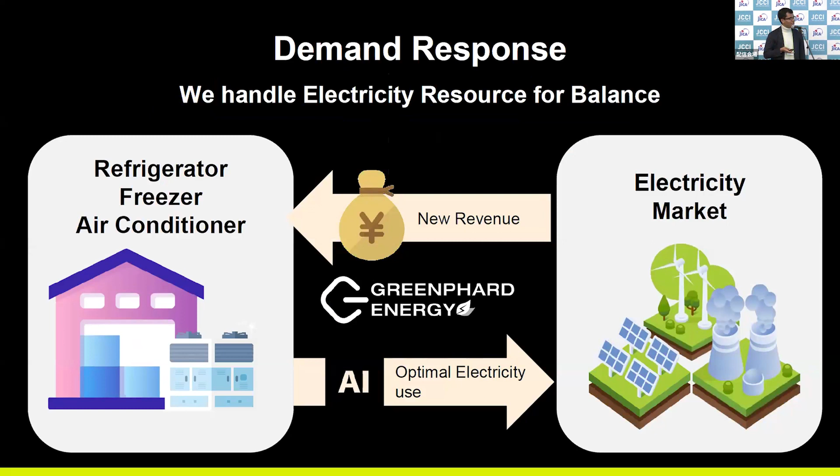So since we have a virtual battery now, your facility, by participating in the electricity market using our real-time IoT control technology, we can respond to requests from the electricity market and generate more revenue for you guys. So your facility basically goes from being a cost source to one where you can generate revenue from energy savings of 10 to 25%, and also from DR, responding to demand response requests.

In the case of a food factory, you can save, literally, I'm not joking, no double counting here, more than $1 million. And then coming to what happens to the environment: you are saving energy, you are helping the supply side tackle energy imbalances, so CO2 itself is reduced, and you are contributing to the environment.

And who are our clients? So basically almost everything. By target 2028, we plan to have 1,000 megawatts of resource. These are the social problems you can help us solve by collaborating with us: more renewable energy, revenue creation, and CO2 decrease.

So what do we exactly do here? Greenphard Energy is here to make a change in how the world uses energy, how all of you use energy. Coming back to the point again, turning cities into virtual batteries—that's what we mean by that. Greenphard Energy will help provide you revenue. And yes, that's it. Thank you very much.

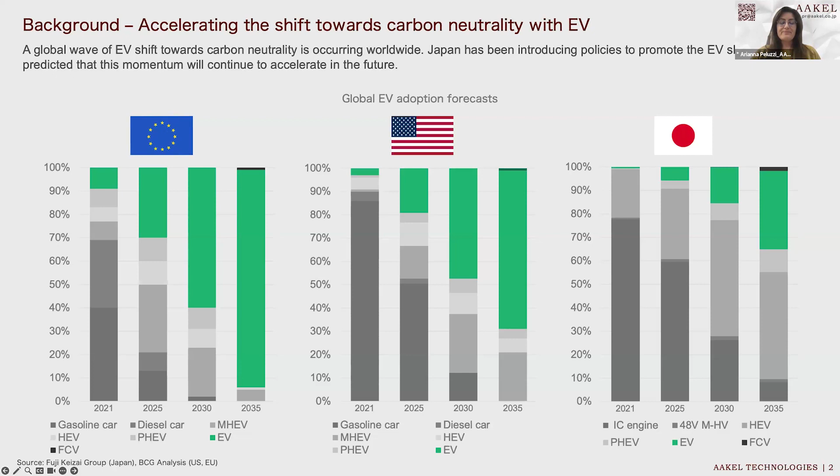When talking about EV charging, there are some general restrictions to take into consideration, starting from charging time. If you want your EV to cover around 100 kilometers, a normal charger would need from 3 to 6 hours, and a fast charger from 20 to 30 minutes.

Another restriction would be chargers and the power contracts. If you want to increase the output of electricity, you need to shorten the charging time, so you need to consider the building's electrical constraints, which means either you update electrical facilities or adjust the power contract amounts. Another restriction is clean energy—we do want to charge our EVs with renewable energy, but the problem with renewable energy is that it is weather dependent and is generated in limited hours.

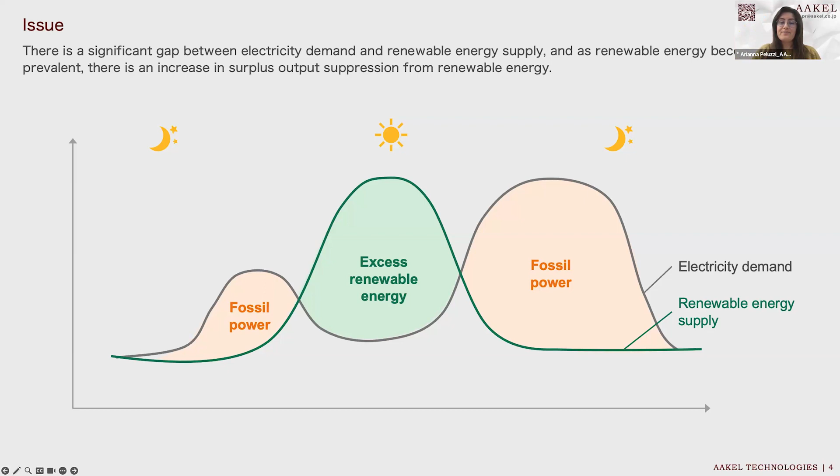So what we tend to do is usually to match supply with demand. But in this case, we want to do the opposite. We want demand to match the renewable energy supply. And to control demand, we need elements such as heat, hydrogen, and EVs.

So to effectively use renewable energy, we need to focus on sector coupling. And AAKEL is focusing on this sector and is developing solutions in it.

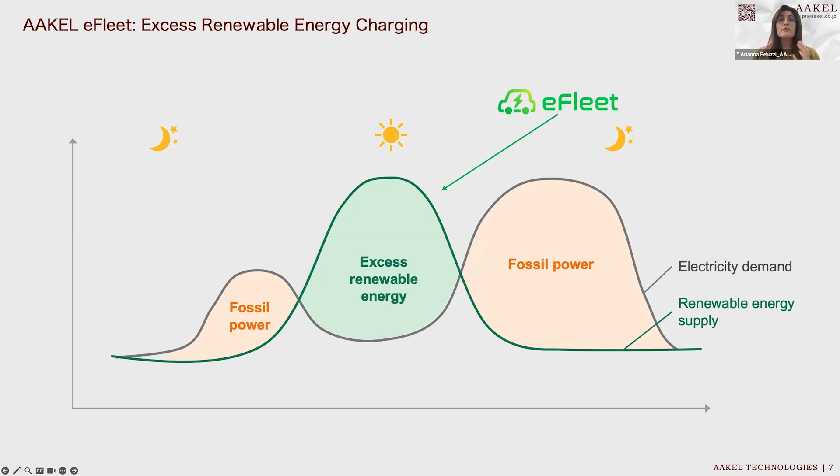Our solution is eFleet. With eFleet, we can create demand during the excess of renewable energy. That's why we want the demand to match the supply and not the opposite, because the renewable energy supply is created only in those limited hours.

Our service, AAKEL eFleet, is a software that gives you a solution when charging and managing EVs. There are different elements involved, such as dynamic pricing. You can create a schedule through the AI, charge automatically at the times you prefer, and it is environmentally friendly and cost-effective.

More in detail, eFleet consists of a vehicle IoT device that we put into the EV. This device reads the state of charge and GPS location information of the EV and sends the data to the cloud. The cloud is then connected to the EMS controller, the Energy Management System, which controls the flow of energy and communicates to the charger and the EV.

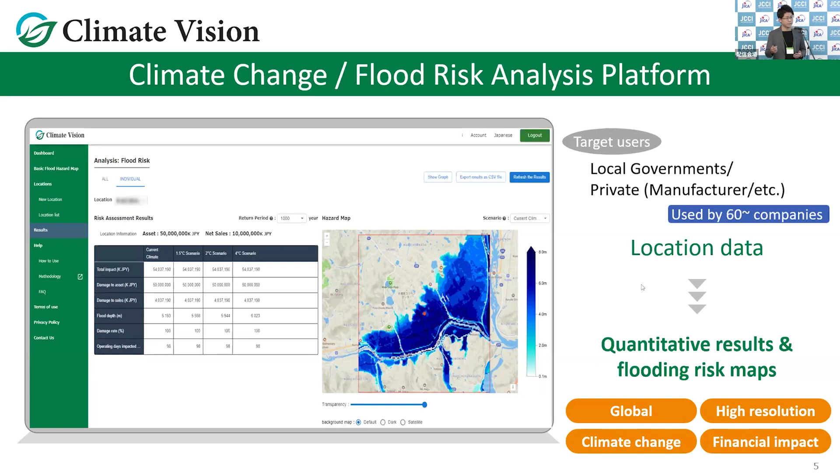First of all, climate risk analysis. By using this solution, you can analyze flood risks anywhere in the world. This solution is used by private sectors as well as local governments who would like to understand flood risks to develop plans for risk mitigation.

One of the features of this technology is the capability of future predictions. For example, at some location, the flood risk might not be so high at this point, but it could be different in the future. By using our technologies, you can understand not just current risks but also future risks considering climate change, including 1.5 degrees Celsius, 2 degree, and 4.0 degrees Celsius increases in the world. You can also understand those risks in a quantitative way, meaning the financial impact.

Our strength is the capability of high resolution simulations. Compared to existing technology, our simulation data is higher resolution. In some cases, existing data might not be sufficient to develop future plans as well as convince people to understand those risks.

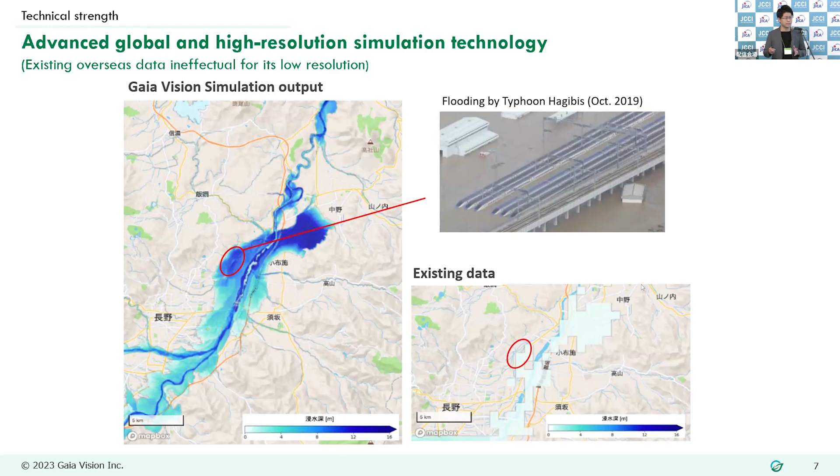Our solution is listed in a national guideline that promotes private sectors to understand those physical risks. Our solution is listed in this guideline as one of the products that can simulate future climate change. Because of this guideline, there are increasing customers who use our solution.

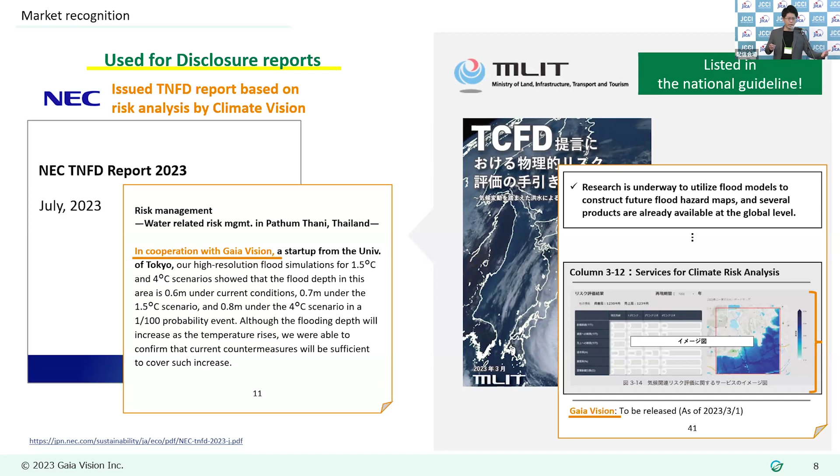For example, NEC announced an information disclosure report last year. In this report, they mentioned that by using GAIA Vision solutions, they understand the future risks at their factory in Thailand, and they identify what has to be done at these factories.

The second feature is real-time prediction. Using this solution, you can understand future flood risk 1.5 days ahead. Let's see the video.

At this point, flood will happen at this red point. This is where a huge disaster happened a couple of years ago, and the flood will come out to the river. By using our solution, the owner of this infrastructure can understand the risk one day beforehand, so they could make some controls at that point.

I would like to show you another demonstration. This is a demonstration movie for how our solution can be used.

What we try to demonstrate here is when huge rain is coming, how the local government can handle it. When huge rain is coming, the people at the local government office wait at the office, and even if the huge rain alert is issued, it's very difficult to make a decision for evacuation orders, especially in the midnight, when it gets more difficult.

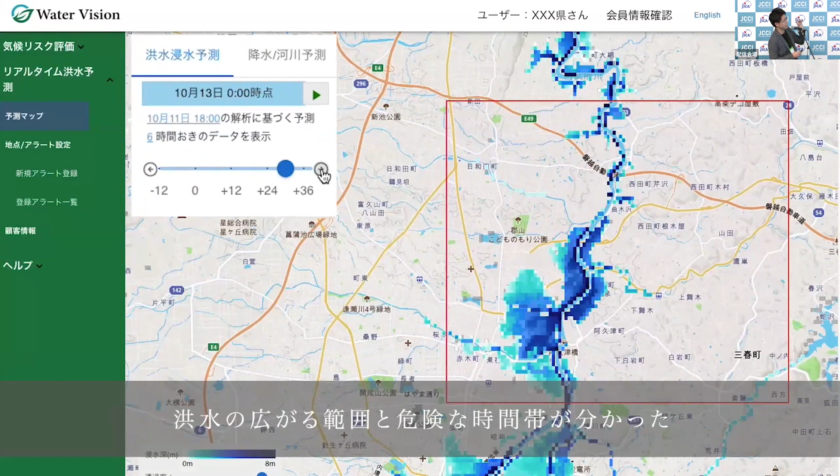By using our solution, there's an email notification which suggests that in 18 hours, the flood will happen at a specific point. You can see the extent and depth on this map, and by seeing this, you can identify which area and when the danger will happen. Based on this information, people can decide: it's going to be okay until this morning, so let's issue the evacuation order at daybreak.

Finally, I would like to explain how our solution is innovative compared to other solutions. Existing solutions are mostly based on river level monitoring using river level sensors, but using our solution, you can identify flood inundation as well—before the flood happens, when and where it will occur, and how to make the evacuation orders. Thank you very much.

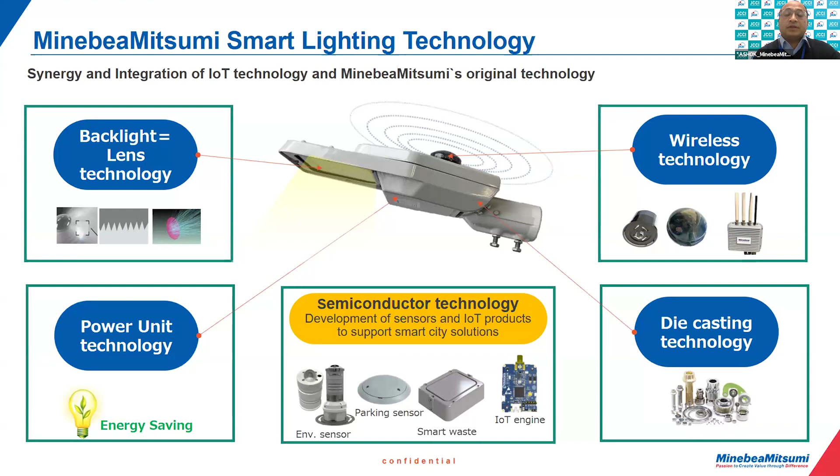With the help of our existing semiconductor technology, we have also developed sensors and IoT products that support our smart city solutions. To summarize our smart city and smart lighting technology, I have outlined five main features. The first is efficient lighting.

Our street lights can emit very uniform and efficient lighting, making the road at optimum brightness. We can also control the lamps for dimming.

The second is wireless technology. Each street light is connected to the internet by a mesh wireless network, which is a free broadband wireless band that can be used freely by the city.

The third is centralized management. Here, all devices connected to the internet can be monitored and controlled by the same CMS, which means the Central Monitoring System.

The fourth is energy saving and GHG emission reduction.

By dimming control of the lamps, we would be able to save excessive, remarkable amount of electricity, and that will contribute in reduction of CO2 emission.

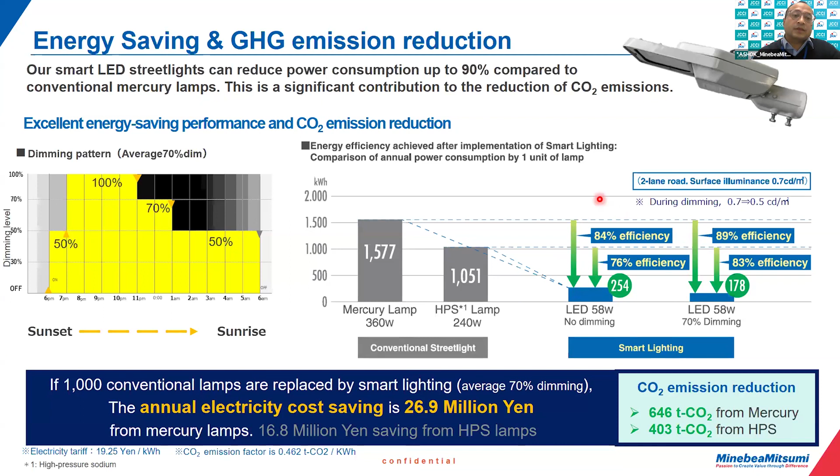This is a use case of dimming in Japan, one of the cities called Nasushiobara City. They adopted our smart street lights and are operating them with multiple environment sensors, using these dimming features to save electricity.

One distinct use of these features was during the earthquake in Japan in 2022, when the central government requested each regional government to reduce the consumption of electricity. The city of Nasushiobara could immediately respond to that request by applying the dimming schedule to their smart streetlights.

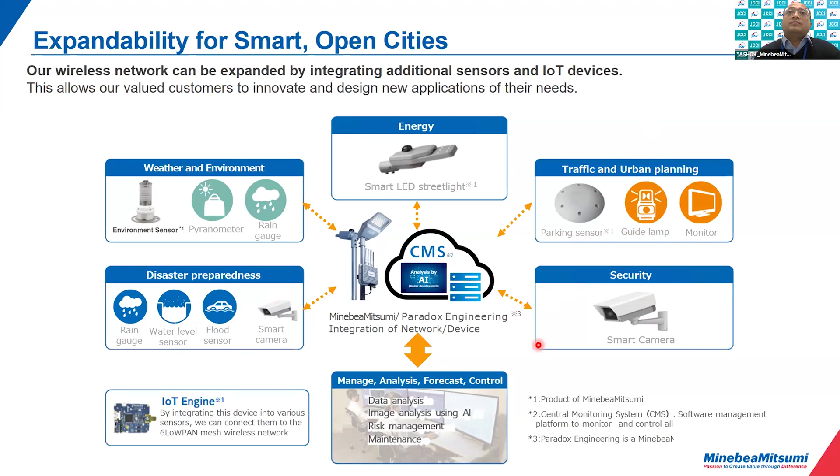This is also one of the important features called expandability for smart and open cities. In the street light network, we can add different sensors and IoT devices to create solutions for the city or for the residents in the sectors of weather and environment, disaster preparedness, security, traffic, and urban planning. So we can utilize the same wireless network platform to expand the solution in different sectors required for the city to make it really a smart city.

Going to the next slide. From now on, I'm going to introduce some of the concept and use cases of the smart city solutions by MinebeaMitsumi. This is one example of IoT devices and the sensor called environment sensor unit that is developed by our company.

It is a very small unit that can be installed in the street light. As you can see, it's a small unit, but it can sense about 8 different types of parameters, and it can be installed easily.

By using this, we can generate different solutions in the sectors of weather and environment and disaster preparedness. Here is one use case of this environment sensor with the camera.

This solution has been implemented in Osaka Prefecture in a mountainous region where they experience heavy rainfall, heavy snowfall, and road icing, causing many accidents. By implementing this solution, they can monitor the condition of the road by camera and also check weather parameters such as temperature, air pressure, humidity, and wind speed. In this way, the prefecture office can control the traffic volume or direction to prevent road accidents.

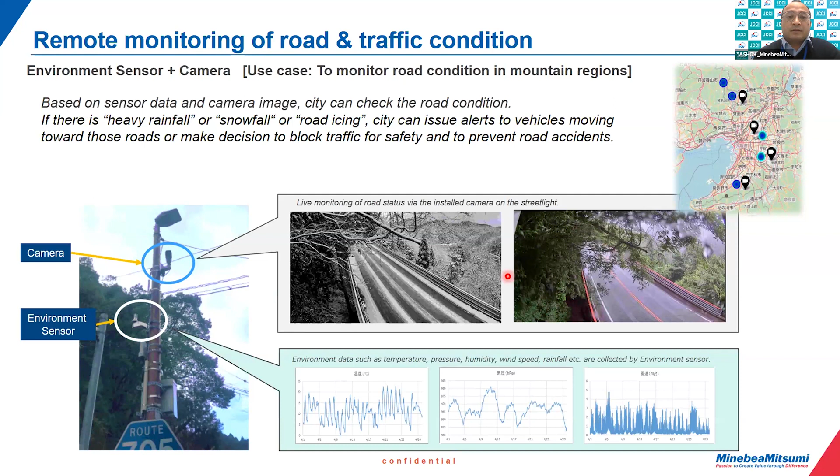Okay, yes. We have a few more slides to show you the use cases, but I'm going to skip to the last.

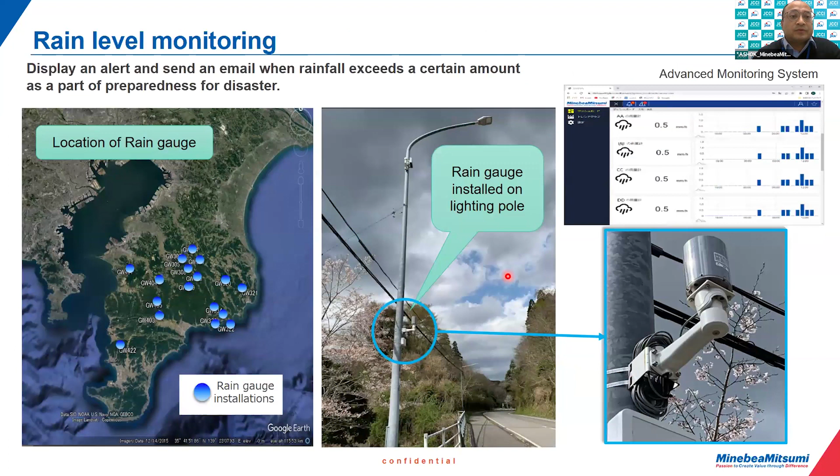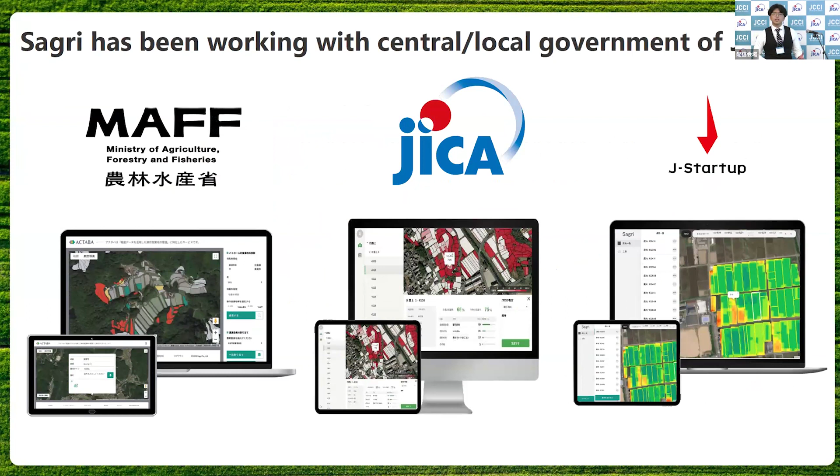In Sagri, we have been working with a lot of central and local government players such as MAFF, and also we have undertaken a lot of projects from JICA. For example, in 2021, we had a project with India, and also this year we are selected for a project in Peru. So not only in the domestic market, we have gone beyond to a lot of different continents such as South America, Africa, and also Asia.

Just a little bit of our accomplishment: 3 months ago, we had the opportunity to present our track record in COP28 in Dubai.

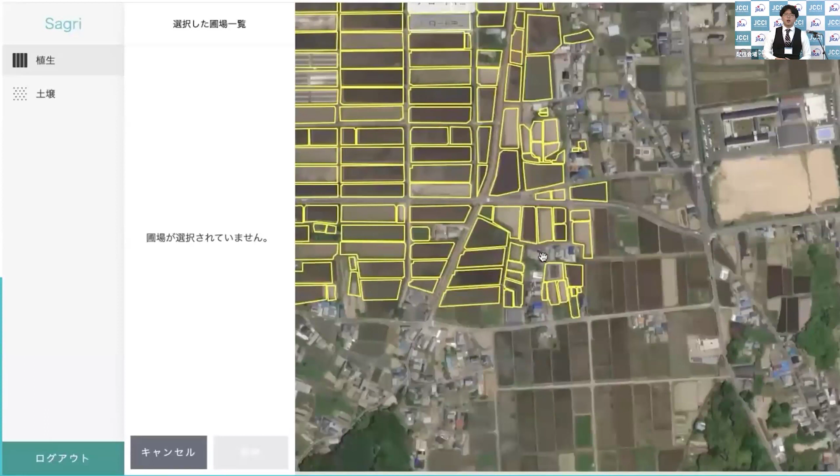So let me explain about our technology. Using our satellite, we are able to automatically create blocking using our technology called AI Polygon. Using this kind of information, we are able to provide several pieces of information about soil analysis, such as the pH, CEC, total carbon, etc. And using this data, we are able to provide advice to farmers to optimize their fertilizer usage.

So our company has two pillars of technology. The first one is AI Polygon, which automatically detects farmland boundaries. The second one is satellite-based soil analysis with an accuracy of about 85%.

In the traditional sense, whenever you want to do soil analysis, what you have to do is take a soil sample and send it to a laboratory. That process itself takes about 2 to 3 weeks, and the cost for one sample is about $50, which is pretty expensive for a lot of farmers.

However, in Sagri, we can provide an alternative in which the time consumed from 2 weeks can be reduced to just 2 or 3 days. Meanwhile, the price itself is only about $5 per hectare. On the right side here, we are providing 12 different parameters, which are micronutrients and macronutrients, very useful for a lot of farmers.

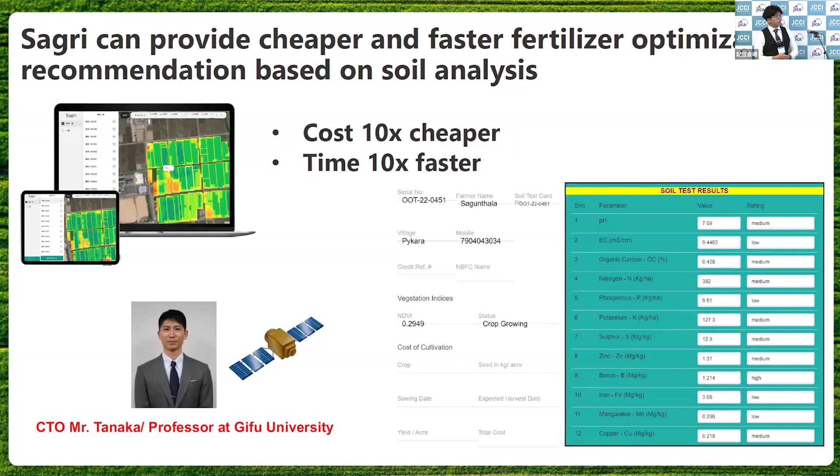In addition, we have been working together with JICA, where we can also detect water. The mission for this project is to reduce the amount of methane produced during rice cultivation.

These are the types of crops that we are able to analyze, such as rice, cassava, sugarcane, etc.

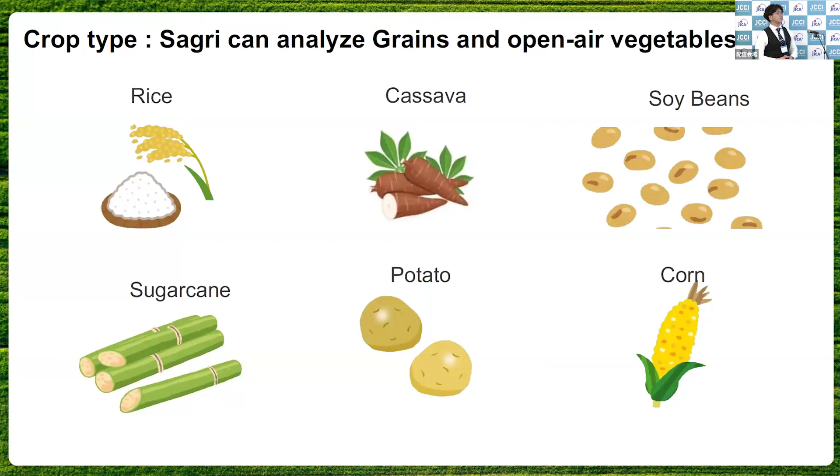As I previously mentioned, using the data we are able to provide advisory to farmers to optimize their fertilizer. If you over-apply fertilizer, it actually becomes counterintuitive, increasing the amount of greenhouse gas emissions, so-called GHG, in the form of N2O. We are trying to reduce this agent of GHG, and at the same time, by reducing the GHG, we are also able to convert them into cash.

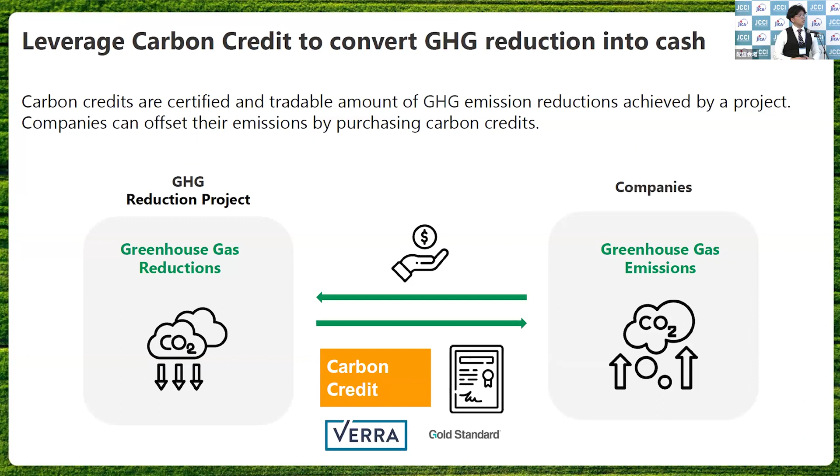How do we do that? We have been working together with a lot of international certifiers such as Verra or Gold Standard, where we claim those reduced GHG into a carbon credit, and then we sell them to companies such as those in Japan and the US.

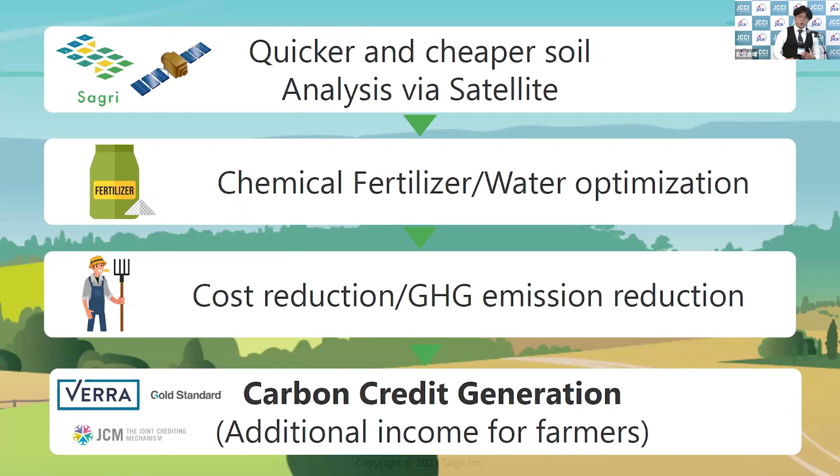So this is the summary of what we can do. The first is that we can provide a quicker and cheaper soil analysis. Second is chemical fertilizer optimization. By doing so, we can also reduce the cost of fertilizer usage, which can lead to a reduction of GHG emissions. And of course, by reducing this GHG, we can claim those as a carbon credit, which can serve as an additional income for the farmers.

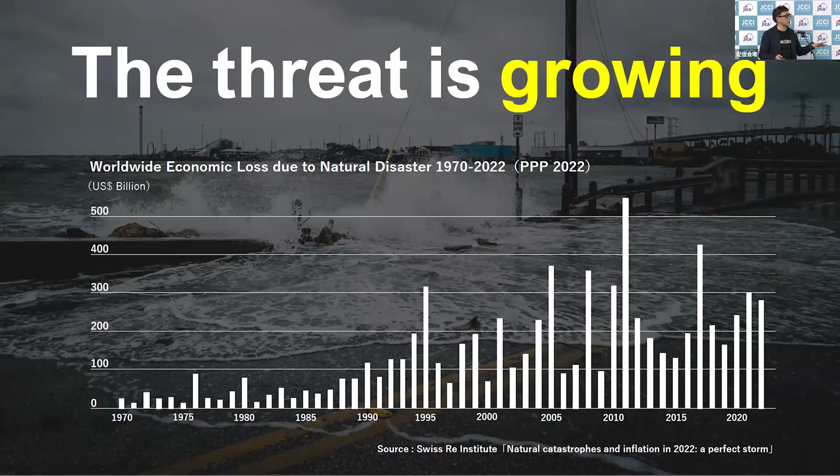SPECTEE - our founder established this company in 2011 to tackle these problems, and we are fighting disasters utilizing advanced technologies like AI. Our corporate mission is to visualize the crisis.

This is SPECTEE Pro. Today we have limited time so I'd like to show the actual product, but today we only show images. We are collecting information from social media, climate data, security cameras, satellite data - so many data sources integrated and analyzed by AI and delivered to customers. We rely mainly on information from social media.

Because recently everybody has a smartphone and most of them use X, Instagram, and YouTube, if something special happens in front of them, they shoot a picture or video and post it to social media. So we use AI to catch this kind of information, spot the exact location, and deliver it to customers.

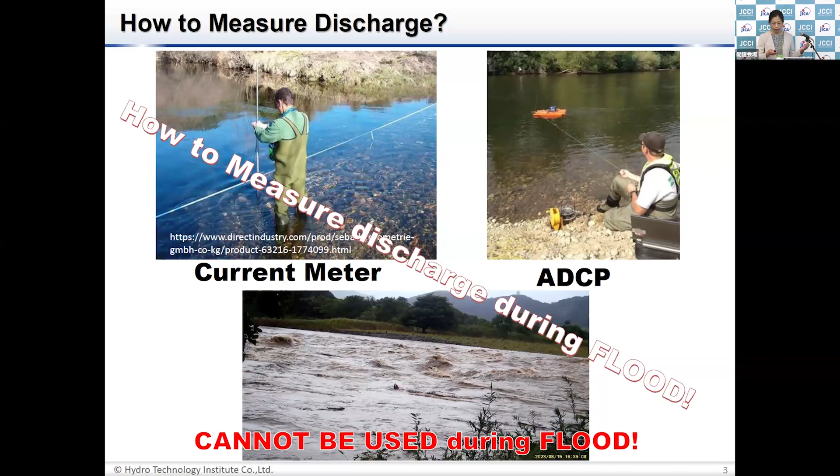The answer is Hydro STIV. Hydro STIV is a flow velocity measurement system using video image. Because it uses video image, you don't need to go to the river during a flood - it's safe, right? Other features are high accuracy and versatility.

Let's move on to versatility. Hydro STIV is available for a variety of situations. How about at night? With an ultra-high sensitive camera or far-infrared camera, they catch the river surface, and lights also make the river surface visible, allowing us to measure river discharge at night.

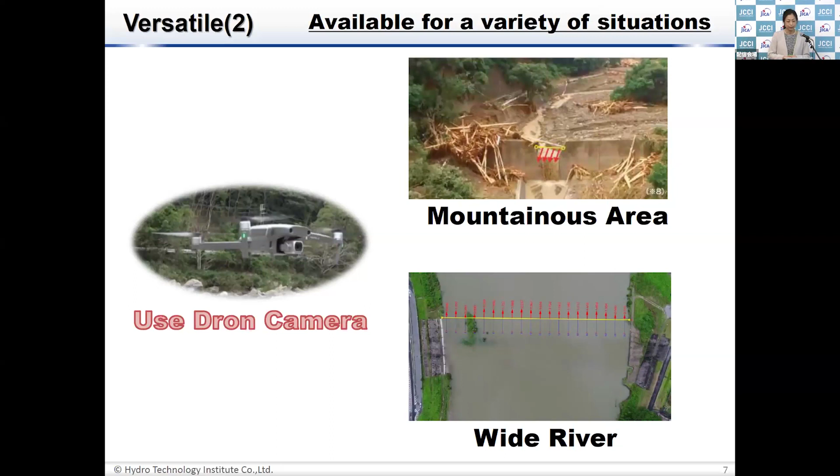Let me introduce some products. The first one is Hydro-STIV Real-Time. If you want to monitor river discharge continuously, it's convenient - this system calculates discharge every 10 minutes, and you can see the result in the office or everywhere on your smartphone.

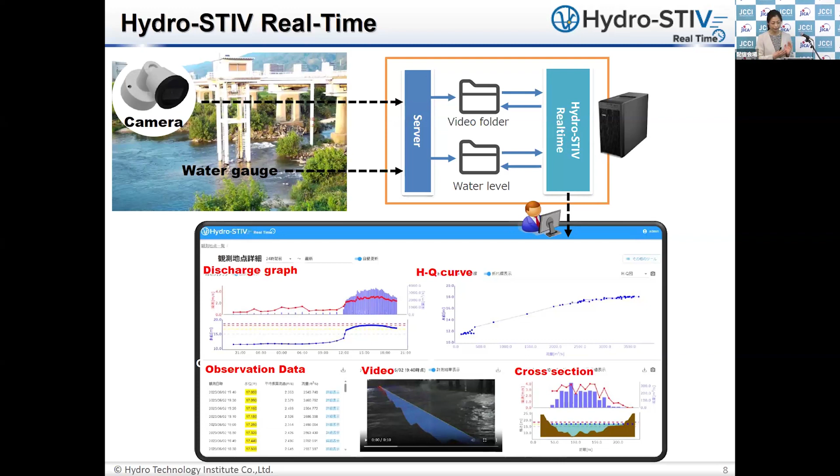If you want to know the result on-site, Hydro-STIV Portable is convenient. You take a video with a camera equipped with the portable unit and get the result in 1 minute. This Hydro-STIV Portable can also be connected with a drone.

Finally, I'd like to show you how widely it is used. Hydro-STIV is already adopted in many countries like USA, Canada, Australia, New Zealand, France, England, Korea, Vietnam, and many others. So we can recommend it with confidence. Thank you very much.

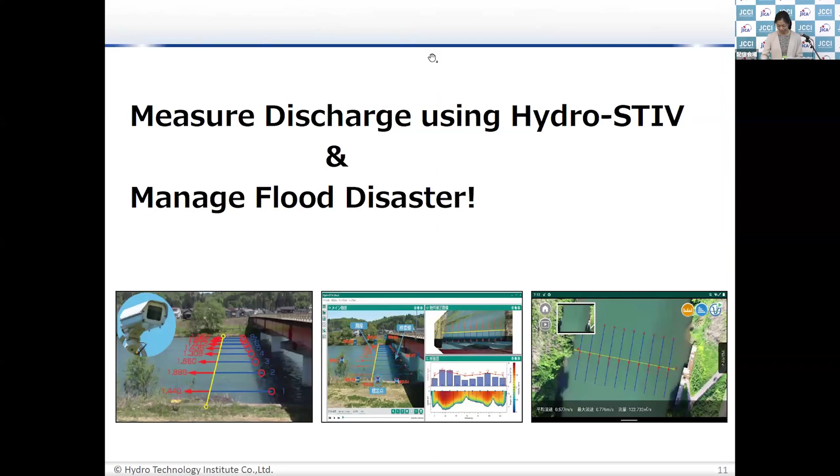Nice to meet you, I'm Tsujimura from TAKINO Filter. Today I'd like to talk about our product, and thank you for the opportunity. Our major product is called TAKINO Filter, which we produce and sell. The product name is the company name, so those are the same. We're celebrating our 30th anniversary this year, and TAKINO Filter is the only product we handle.

Okay, next page please. So first of all, what is a TAKINO filter? In mountainous areas, you might have road constructions.

And also development for land development, as well as heavy rain and earthquake disasters causing erosion of slopes. So those slopes need to be worked on in terms of preventing erosion and promoting revegetation.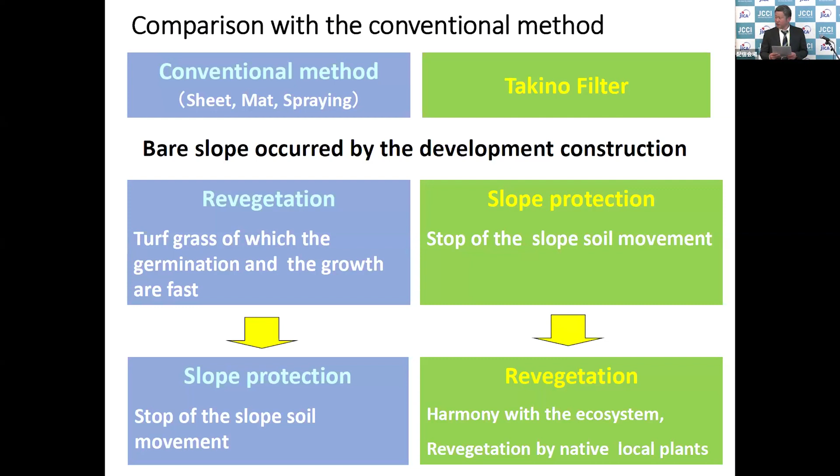And how does it control erosion? The polyester fiber - when there's a raindrop, it flows on the filter, so the water doesn't permeate into the mat, and since it is polyester, it repels water. Because of that, it can maintain its width, and even with rainfall, the impact does not travel to the soil underneath. This is staple fiber, so it adheres very closely with the soil, and it therefore stops the soil movement. That is how it controls or prevents erosion on the surface of the slopes.

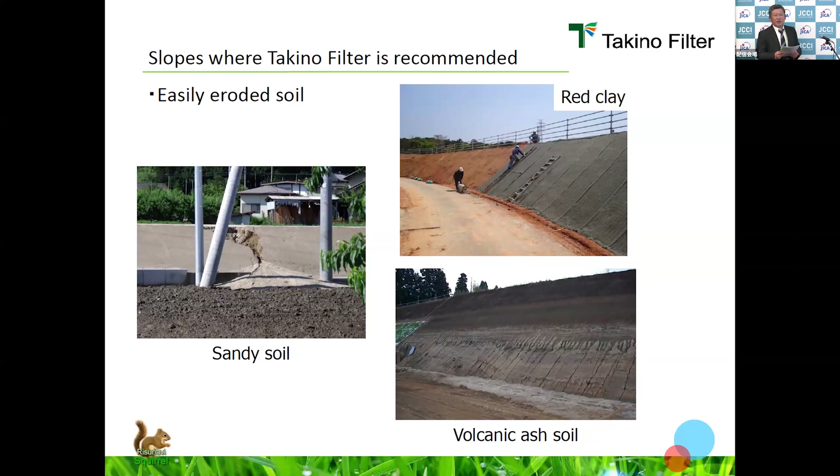Next page. These are the types of soils where the Takino filter is often used: soil that easily erodes, such as sandy soil, red clay, and volcanic ash, because they erode very easily. Red clay, shown in the top right corner, is seen widely in Okinawa Prefecture, and they use it to prevent erosion. That concludes my explanation, thank you so much for your kind attention.

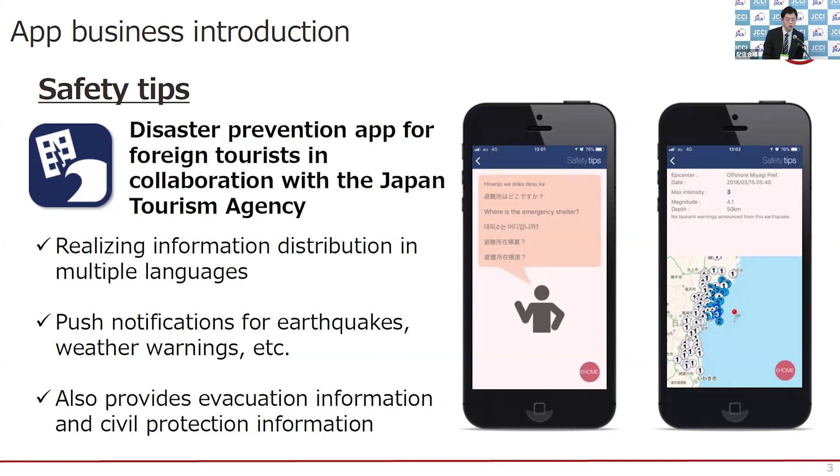Today I'd like to talk about the Safety Tips app. Led by the Japan Tourism Agency, we have developed this app especially for foreigners in Japan. We provide information in multiple languages. Once you install it, you register the country and language that you would like to use, and based on our statistics, we start to see how the app is being used.

Several years ago, under COVID-19, and after that, many people started to visit Japan once again. Safety Tips downloads went up as well. In terms of country, during COVID many were from Japan, but we started to see an increase in Taiwan and Hong Kong.

It seems like there are many visitors. And also looking at the language setting, for Taiwan and Hong Kong more than 90% have Chinese registered. So you can see that people want to see information in their own languages.

Now I'd like to use the example of the Noto earthquake to show how people are using this. Looking at before and after the earthquake, the number of downloads increased significantly, but the country and language settings really did not change. So it seems like business and travel continued regardless of the earthquake.

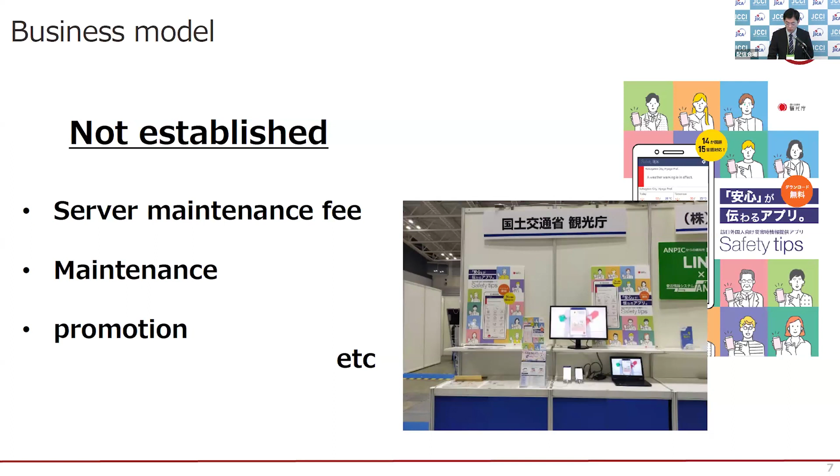Climate change is not unique to Japan. We're seeing it in other countries, especially those where tourism is a major income source, so providing information to tourists continues to be important. In terms of the app, not just providing information at the travel destination, but perhaps we can provide information to people who will be visiting certain locations.

As I said, in Indonesia we conducted a case study. Like Japan, they are a disaster-prone country, but information is not fully shared. We have been working with North Sumatra province's BMKG, and they have not been able to dispel the impression that there's a lot of disaster in this location with no prevention in place. The meteorological agency equivalent of Japan there is BMKG.

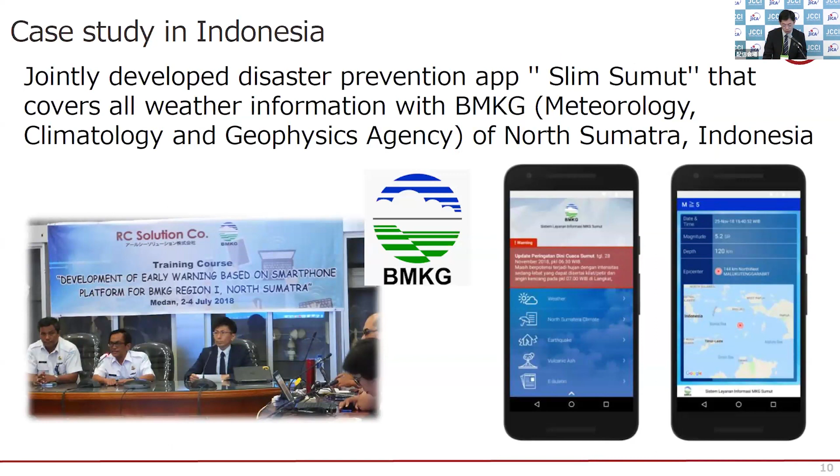So we decided to work with them and provide technical support. Now in Bali, they're starting to consider taking the same approach. Distributing disaster information through an app addresses needs that exist in other areas as well. By offering our technology, we can of course communicate about Japan, and support so that we can be of help in disaster prevention.

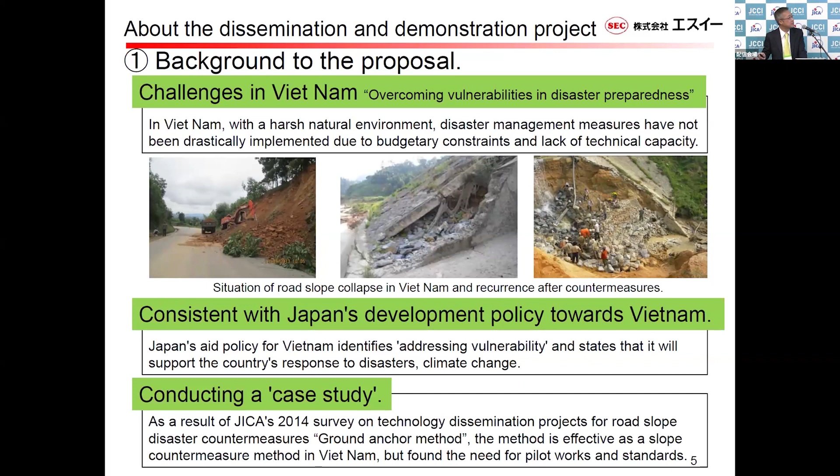Our SEEE ground anchor has a unique feature using a nut tension system. It's easy to install and easy to maintain.

We proceeded with this pilot project in 3 steps: demonstration, promotional activities, and business development.

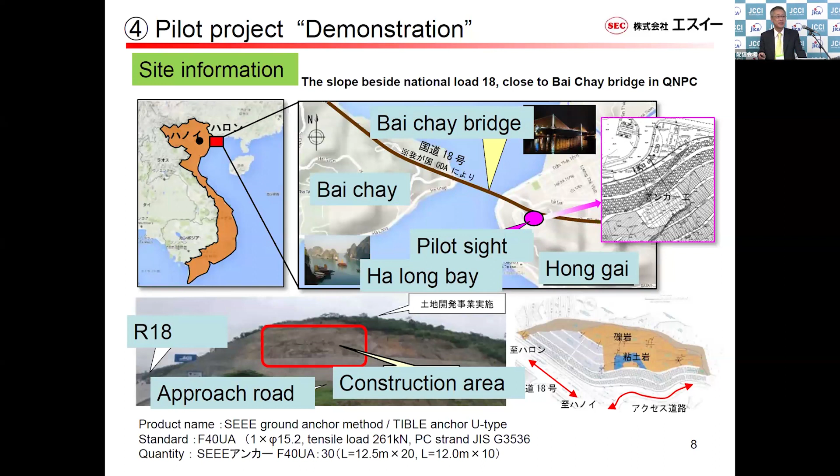This is a site in Vietnam, Quang Ninh province, just in front of the World Heritage site Halong Bay. This is the before and after of our project. We set our ground anchor at the site.

Together with the pilot project, we tried to establish the standard in Vietnam. Once we try to transport our technology from Japan to Vietnam, we need to develop the market, and we even need to establish the standard.

We understand it takes a long time, maybe 3-5 years or more, but without a standard, this kind of civil material cannot be used in each country.

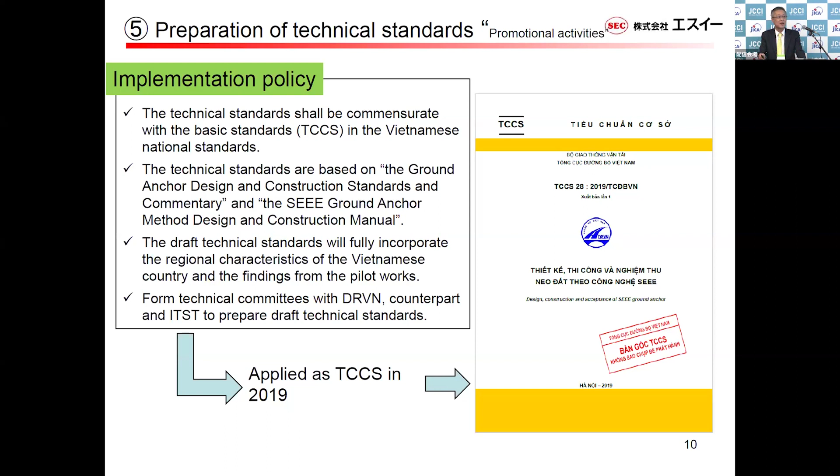That's why we collaborated with some authorities, DRVN and ITST, and the MOT, Ministry of Transportation. And finally, we were able to complete and issue this standard.

What we like to do in Vietnam and surrounding countries is transfer our technology there and try to protect against natural disasters based on climate change. And not only our products, but also our partners' products.

Now we are trying to bring this to Southeast Asia, to growing countries. We want to contribute to disaster prevention and land resistance in Vietnam and surrounding countries.

At last, I'd like to explain one company, our subsidiary in Vietnam, a consultancy company in the construction field. This is a joint venture together with Hanoi University of Civil Engineering.

We are now focusing on the consultancy business and CAD operation, such as offshore drawing and technology transfer from Japan to Vietnam, as well as introduction of highly skilled engineers from Vietnam to Japan.

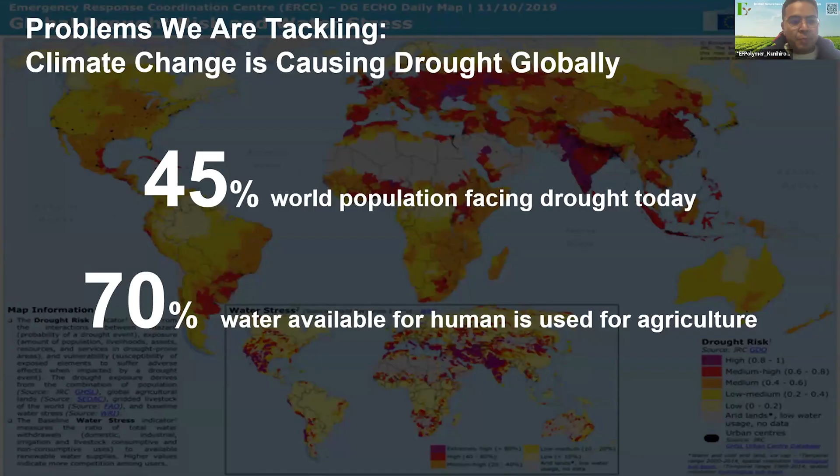As you know, 45% of the world population is facing drought today, and 70% of the water available for human use is used for agriculture. When those two phenomena combine, many farmers face severe drought, which causes a 30 to 40% yield decrease, and farmers are struggling.

To tackle this challenge, our invention is a patented technology to produce a 100% natural and biodegradable water and fertilizer retainer. The product is made of bio-waste, such as orange peels and banana peels, which would otherwise be disposed of and burned, emitting CO2.

1 gram of the polymer can absorb up to 50 grams of water. When you mix it in soil, it absorbs and releases water for 6 months, and then completely biodegrades within 1 year.

We believe this product is an economically and environmentally sustainable way to help farmers retain more nutrients and water while increasing yield.

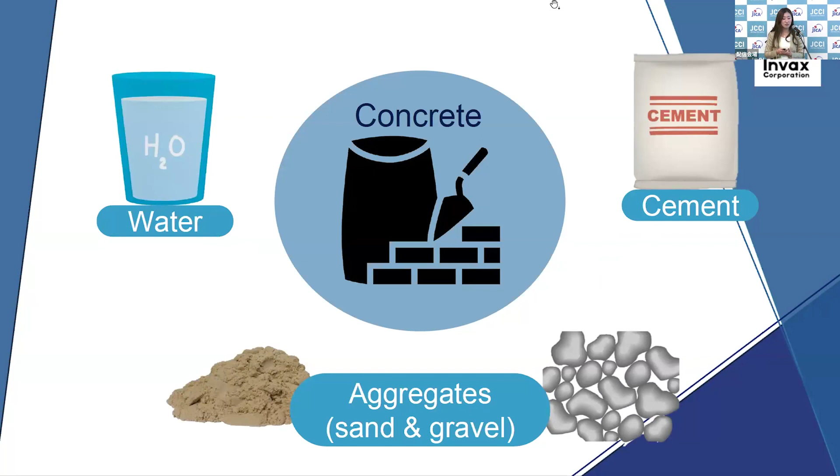I'll explain more in comparison to concrete. Concrete is made of water, cement, and aggregates. On the other hand, soil cement is made with water, cement, and soil.

INVAX Corporation has a technique called hydration optimized soil cement. It's different from the soil cement some of you might know, which is commonly used in ground improvement, in that we can stabilize the soil, solidify it like concrete, and even control the strength. That's the main feature of our technique.

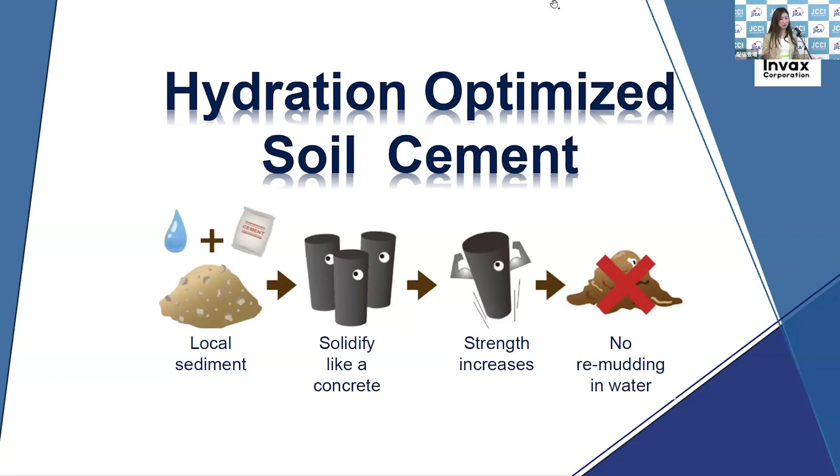Every day, different kinds of sediments are being disposed of, such as excavated soil, disaster sediment, volcanic ash, and dredged soil. We can utilize all those disposed sediments and use them in building disaster prevention facilities, such as check dams, retaining walls for roads, or filling for residences.

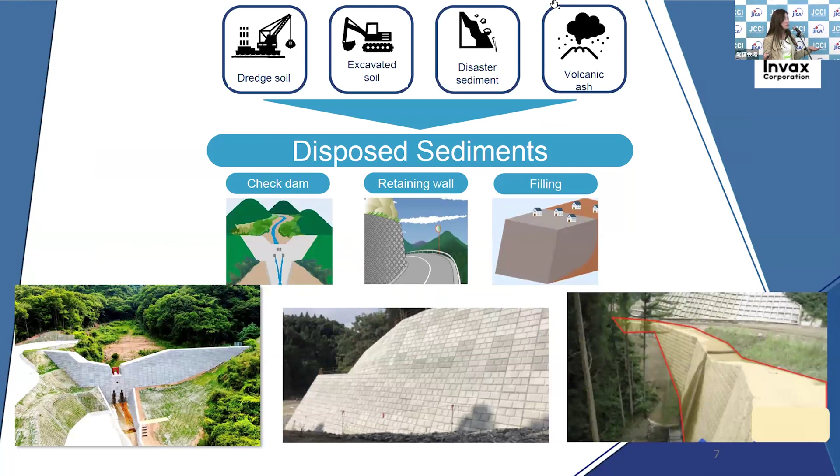Let's say we are building this large check dam. This is an actual photo of a check dam built with our technique. There was supposed to be a movement on this slide, but I guess it's not working, so I'll just keep going.

If that check dam was to be built with concrete, they would first need to transport out the excavated sediments to authorized landfills and then bring in concrete from nearby concrete plants. However, we can skip all that transportation because we use the excavated sediments and blend everything on site at the construction site, producing a material that replaces the concrete.

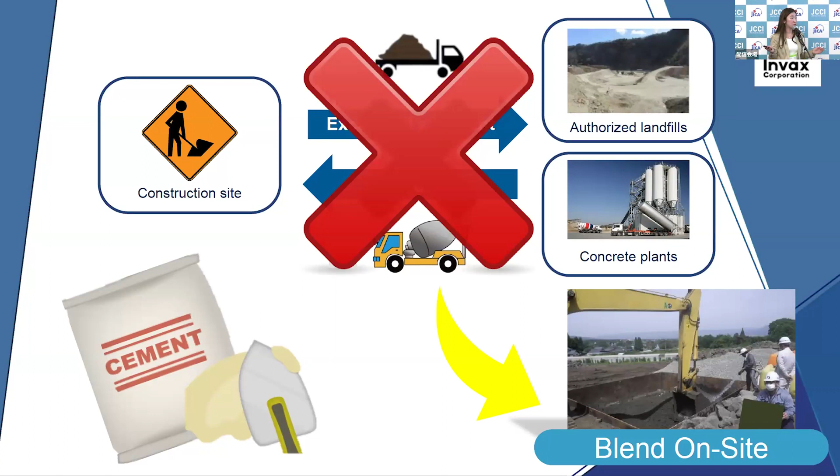We can also reduce the cement required, which reduces the CO2 produced in production. Therefore, we can reduce CO2 emissions by about 68%, again in comparison to concrete construction.

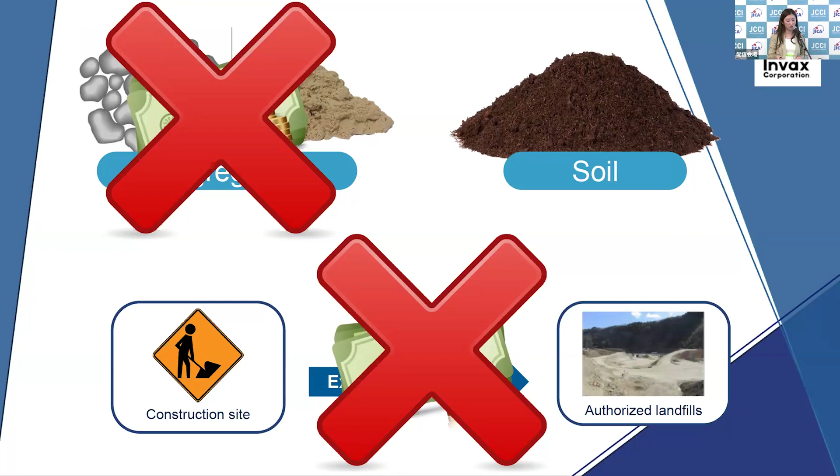Again, we don't have to purchase aggregates because we use the soil or sediments that are available for free. And because we can skip the transportation of concrete or excavated sediments, we can cut down on the transportation fee and also the treatment fee of the excavated sediments at authorized landfills. Therefore, we can reduce the cost by about 33%.

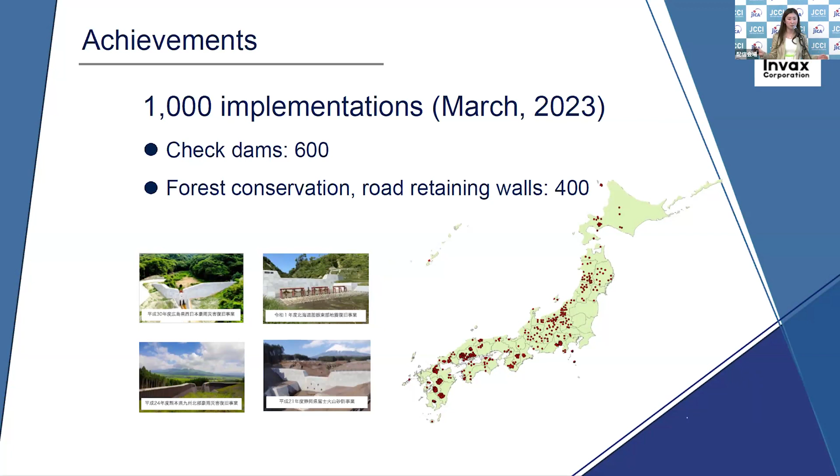Here's our achievement so far. Our technique has been implemented in about 1,000 constructions of structures all over Japan—not just ground improvement, but structures. Let's look at one specific achievement of ours.

Back in 2012, there was a large, record-breaking heavy rain in Kyushu. Due to this disaster, a large amount of sediment and debris was generated, which needed to be taken care of, and there needed to be immediate disaster recovery and reconstruction. What we came up with was called a centralized plant. Because there was so much debris and sediment generated from this disaster, instead of treating them at separate locations, we gathered everything to one location and created a big plant.

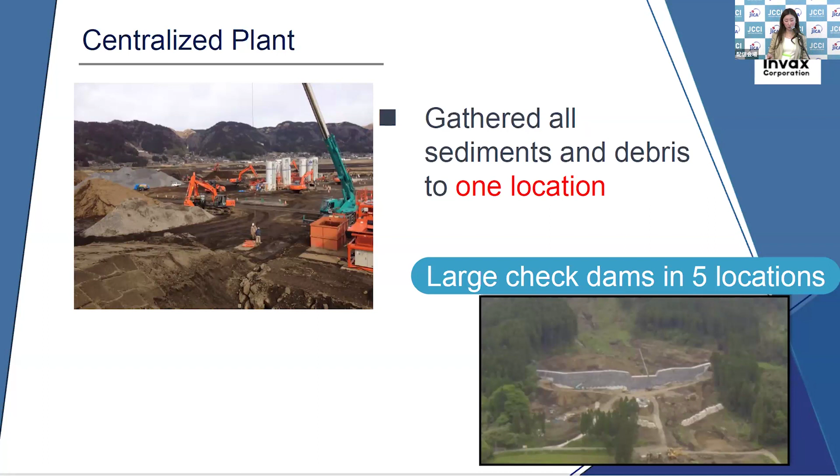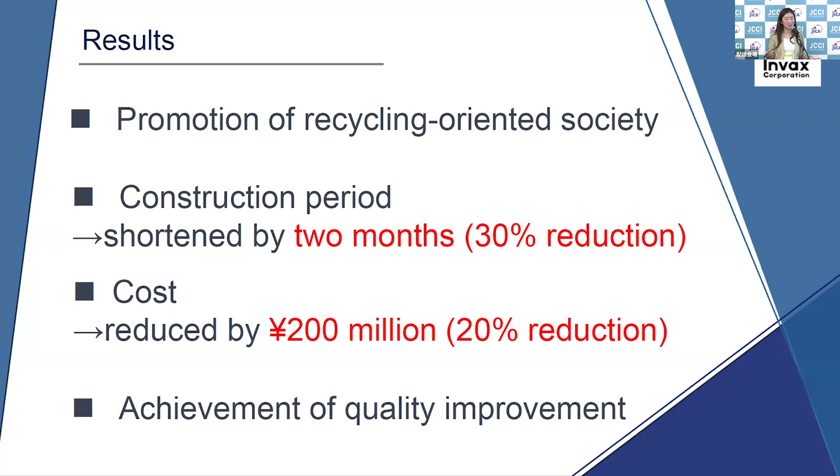The materials we produced from this plant were used in building 5 large check dams in Kumamoto. As a result, we were able to promote a recycling-oriented society, or circular economy, because we utilized the debris and sediment generated from the disaster to build disaster prevention facilities. We were also able to shorten the construction period and reduce the cost compared to concrete construction. Lastly, we were able to improve the quality as well, because we produced the soil cement in bulk.

We can pretty much stabilize any kind of soil, but among many, we succeeded in stabilizing ando soil, or kuroboku in Japanese, which is commonly found in Kyushu or Kumamoto and contains volcanic ash, as well as some soils in cold regions, Hokkaido specifically.

We recently went outside of Japan and started studying a soil called black cotton soil, which is commonly found in Australia, India, and all over Africa. We are studying the one in Kenya at the moment. It's considered problematic soil in civil engineering because it swells when absorbing water and cracks when dry. Currently in Kenya, they need to remove all the black cotton soil completely in order to build something.

But this is before an official announcement—we succeeded in stabilizing it recently, and that's very exciting.

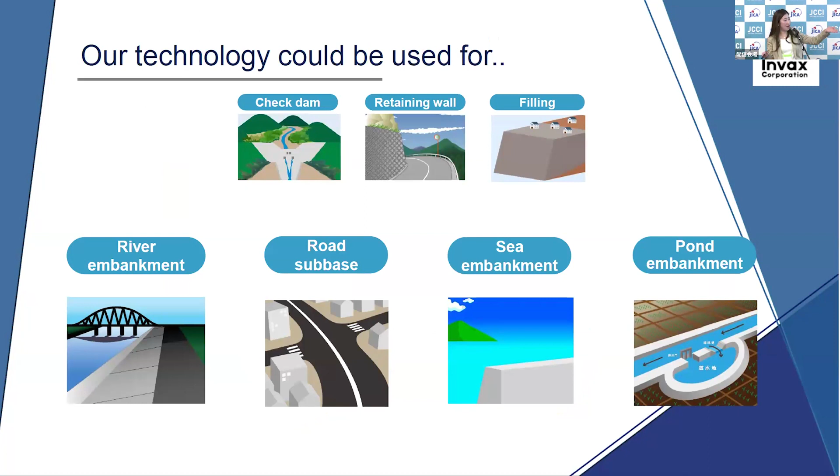We determined that our technique can be utilized not only in those three cases but many other infrastructures like these. To sum it up, our technique only requires materials that are available locally. And with the so-called recipe we can provide according to the sediment or soil being dealt with, the actual implementation doesn't require any special skills, which can lead to the creation of local job opportunities. Combining these two, we believe we can help accomplish a resilient community, or a cycle of local production for local consumption, creating a resilient community economically, socially, and most importantly, environmentally.

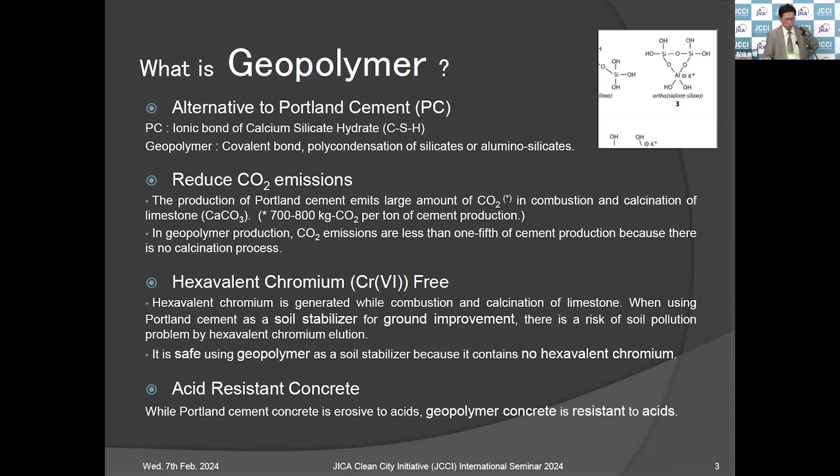In the case of Portland cement calcination, the raw material contains chromium, a metal. Normally it's oxidized and harmless, but when calcinated above 1000 degrees it generates hexavalent chromium, which is harmful. The geopolymer does not generate hexavalent chromium from the calcination process. Also, because it's covalent bonding in solidification, it does not erode due to acids, which is very superior compared to conventional cement.

Now, more about the geopolymer and how we developed it. In the 1990s, many geopolymers used a sodium silicate solution called water glass as a raw material, and initially what we developed used water glass as well. Then in 2006, instead of water glass, we replaced it with powdered alkaline material so it was easier to handle. That product was called Hydegas.

Following that, in 2021, considering use as a soil stabilization material, we developed earth silica together with the Shibaura Institute of Technology of Japan, and patented it in 2021. So Hydegas and earth silica are geopolymers from our company. From 2016 for a couple of years, we did a feasibility survey under JICA for the private sector, utilizing Japanese technologies in an ODA project in the Republic of Kiribati, which is facing a threat from rising water levels. We conducted a feasibility survey there.

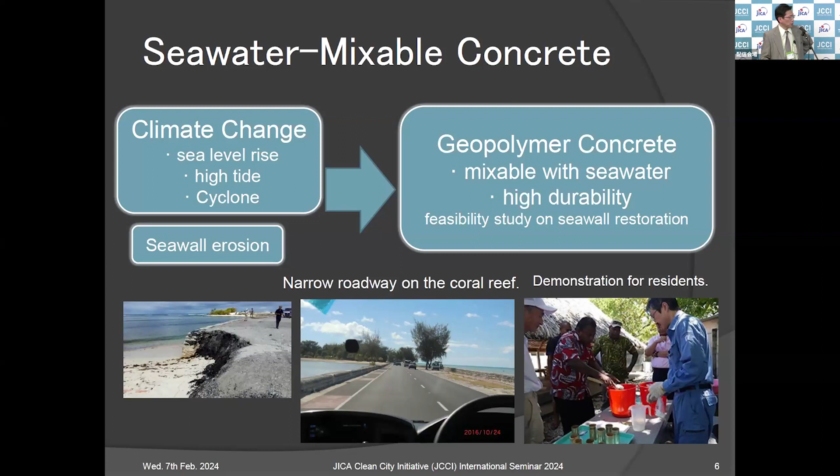The Republic of Kiribati is facing rising seawater levels, and due to rising temperatures, their low pressures are becoming more damaging, eroding their embankments and seawalls more and more. Narrow roads built on top of coral reefs, with sea on both sides, are seeing erosion on both sides. To protect those embankments, we thought we could use earth silica and Hydegas, and that's why we did the feasibility study. The photograph on the right shows how this was done in the local region.

Now, a different topic. Rocky shore denudation, or sea desertification, is a problem around the world, and vegetation or plants around coastal areas are decreasing. The Ministry of Land, Infrastructure, Transport and Tourism of Japan has conducted the Blue Infrastructure Expansion Project for ports that foster life.

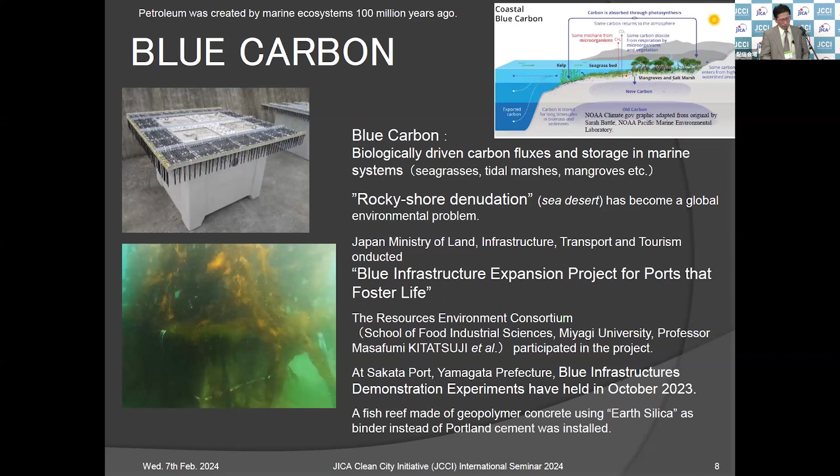But if it's regular cement, it will emit a lot of CO2. So we went for blue carbon, using sea plants to absorb a lot of that CO2. And we use geopolymer concrete that does not emit CO2 here, using earth silica. We think it's very effective against sea desertification and rocky shore denudation, and I think it can be applied to coastal countries around the world, utilizing the plants around the coastal areas to prevent CO2 emission.

So Dobokuchishitsu is making these geopolymers. I do hope that you will know this product, Earth Silica, and try it out. And with that, I thank you for your kind attention.

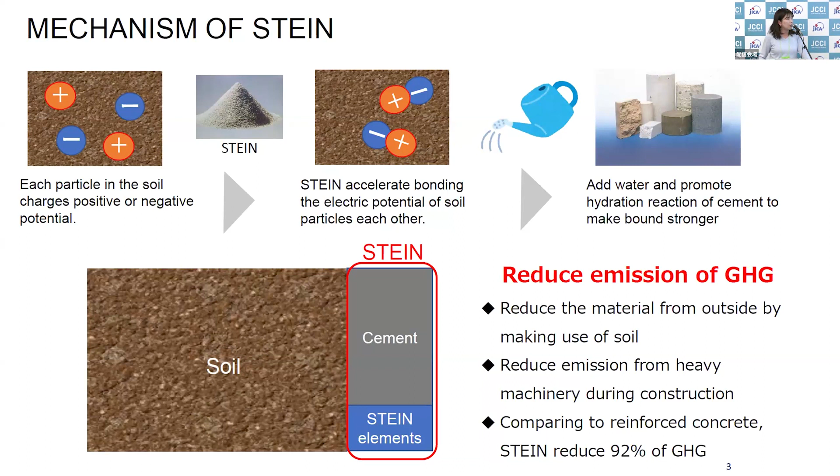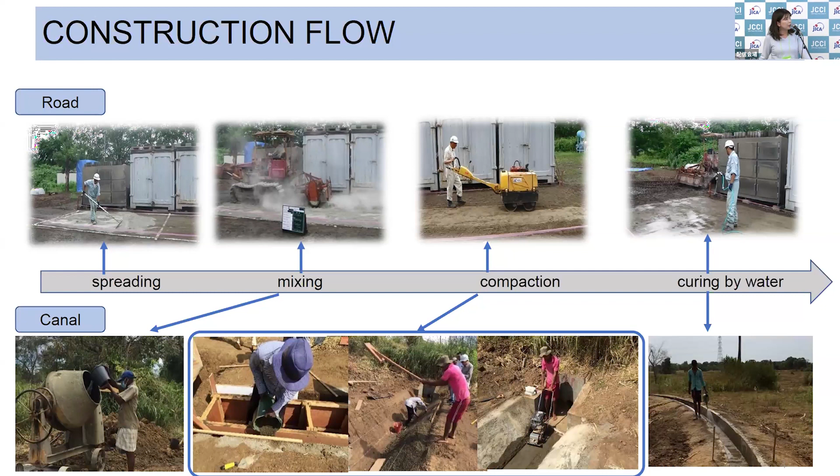Before construction, we do soil investigation to decide the best mixture amount of Stein. In case of a road, we just excavate the original soil, spread Stein, do mixing and adjust water content, compaction, and watering. After 3 days of curing, a heavy truck can pass. In case of canal or waterways, we mix soil and Stein in advance and use a frame compacting tool or compacting machinery for molding and curing. In this case, 3 to 7 days before water flow can pass.

These are some recent projects abroad. In Cambodia, we used a scheme of JICA and set the final product machinery in Cambodia, selecting cement made in Cambodia for local manufacturing. Using this, we did a project with the Ministry of Agriculture and also fisheries. Cambodia is suffering from a shortage of construction material, and they set a goal that by 2050 they will bring emissions of GHG to zero. So we are now trying to approach these two programs.

In Sri Lanka, we cooperate with the local Ministry of Irrigation to train farmers to do the construction of small waterways themselves instead of using construction companies. In Africa, we have several projects in Kenya. Two years ago, we did construction of an access road inside a refugee camp with UN Habitat and a local NGO, and now we're doing joint research with a university to resolve the problem of unique expansive soil, which usually cannot be used for civil works. Also in Nigeria, we collaborate with the state government to increase the pavement rate of state roads.

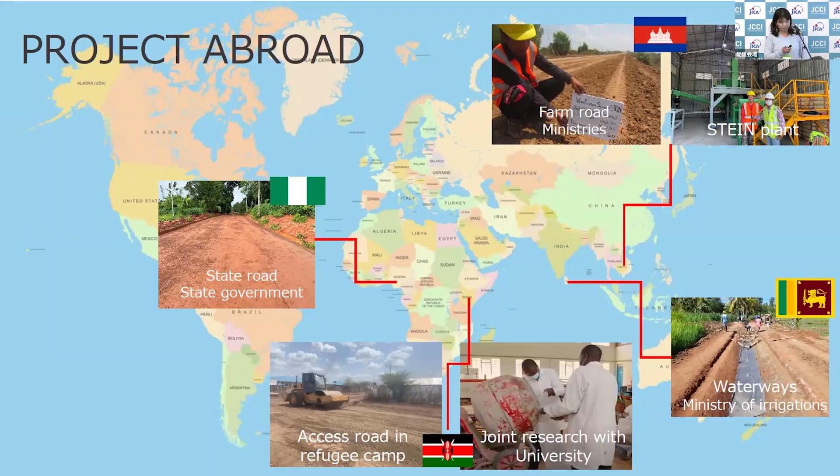Our expected future business model is the same as in the case of Cambodia. We're going to ship Stein element from Japan and procure cement produced locally, then do the final product. With the cooperation of our local partner, we're going to secure the quality of the product itself and also the outcome of the construction, then promote this material to both private and public sectors.

This is a summary. I would like you to remember that Stein is a soil hardening agent, used to construct roads and irrigation. It can be sustained in good condition for at least 10 years, at most already 48 years. It can also reduce construction costs compared to reinforced concrete by 40 to 60%, and reduce emission of GHG by 92%. We're going to promote local manufacturing and contribute to the increase of GDP of the country.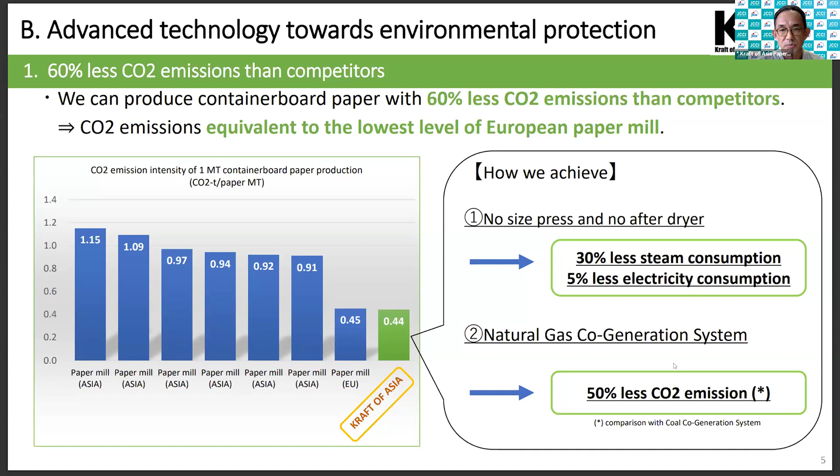So per ton of paper, roughly a ton of CO2 is being emitted. On the right, second from the right, renewable energy has penetrated, and paper mills at EU use about half of that. For us, although we operate in Asia already, the GHG emission per ton of paper production is equivalent to the EU, and you can see how we are achieving this through two approaches.

In order to ensure quality on the surface, starch is applied by competitors, and because of that the drying process takes longer. However, we don't apply starch - instead we add a special agent to the paper itself. That's how we can reduce the production line.

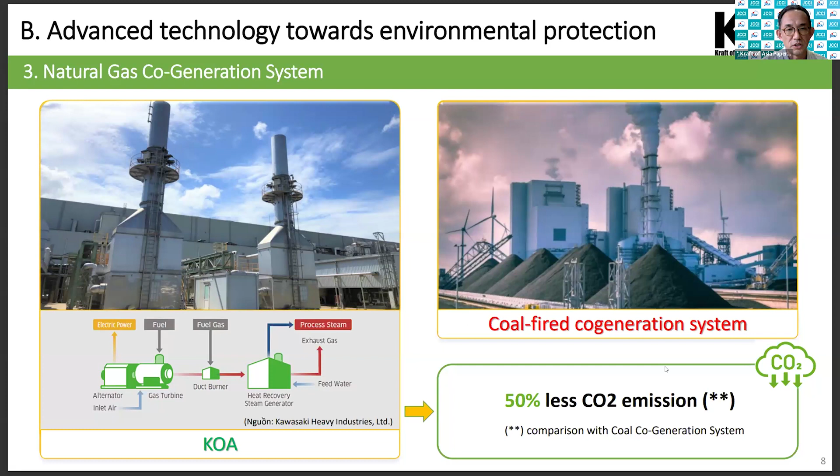That's one thing. And another point, like I said earlier, coal-fired is still the mainstream in Asia, including Japan, but we're not using coal at all - we're relying on natural gas. Through these two approaches, compared to other companies, we are producing paper with half the emission.

If we use this approach in Vietnam, it will damage the water, whereas if we import from the US, the water is maintained cleanly. The emission standard is very strict in Vietnam, at 3 times the standard level, so in order to overcome this emission standard it requires a lot of chemical agents to be applied. Producing paper without starch is a clever way to overcome this standard.

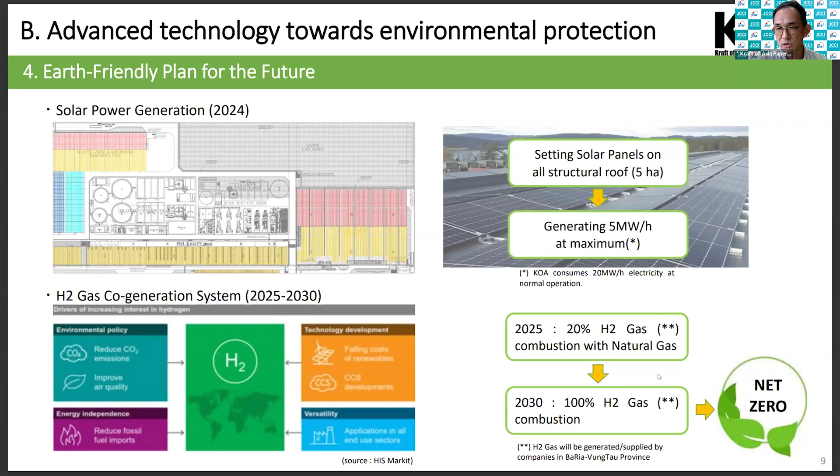Towards 2030, clean energy, hydrogen - we are planning to use hydrogen. In addition, we rely on old paper, used paper, which means there's contamination.

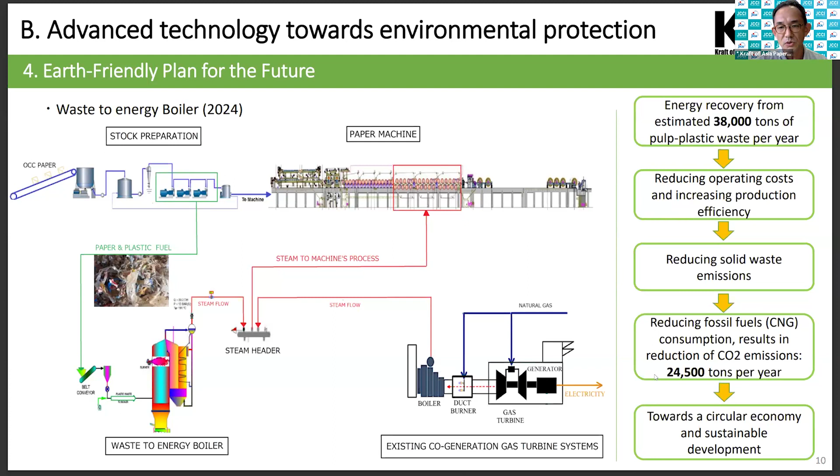So the boiler to use this as a fuel is installed. Not only waste, but biomass, to be more specific, rice husks. When it comes to rice production, Vietnam is number 4 in the world. About half of them is being wasted, but we would like to take advantage of the rice husks as well.

So these initiatives are underway, and in order to let the word out to society and customers, on our label, I think we're the only ones in the world who indicate the emission of CO2 on our label.

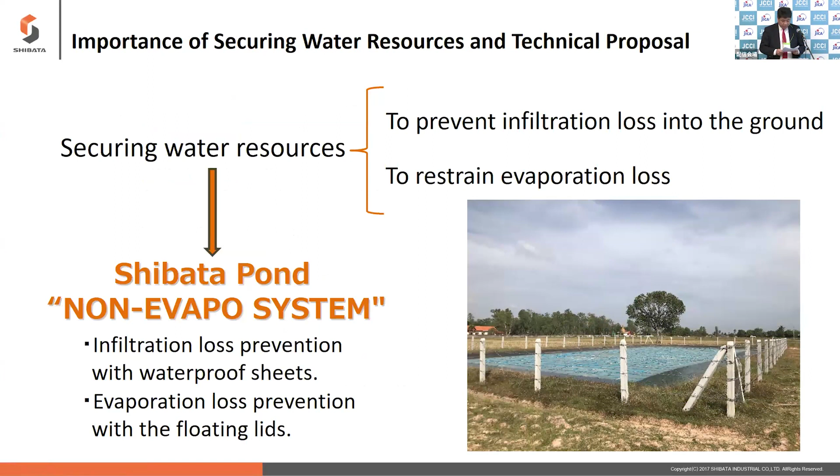We'd like to suggest the SHIBATA pond NON-EVAPO SYSTEM. There are many countries that dig ponds, but most only dig holes. In Japan, we usually not only dig but also use lining. Furthermore, we developed anti-evaporation floating lids as a drought countermeasure.

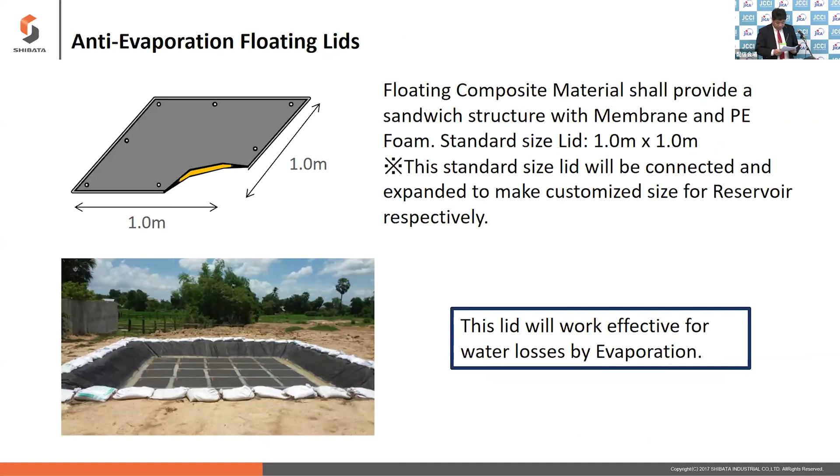We conducted a study at a Japanese university to examine the effects of floating lids on water, comparing water with lids and water without lids. The water in the pond without lids has sludge. The water in the pond with lids does not have sludge.

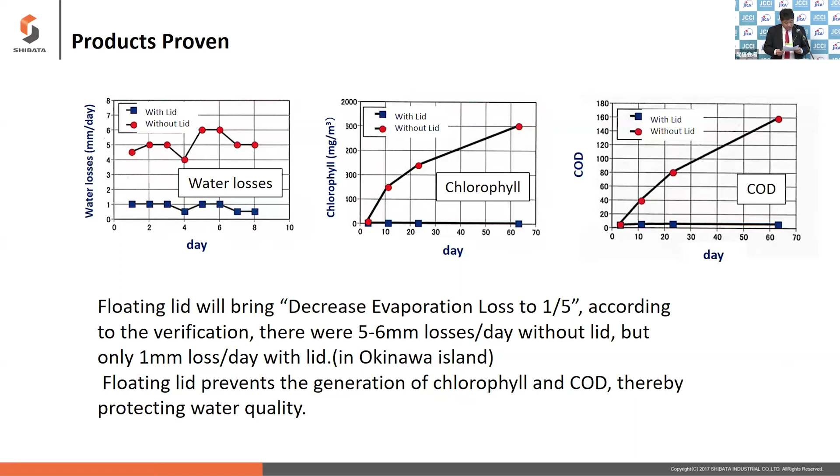Result: the red line shows without a lid, and the blue line shows with a lid. Using lids gets the best result. Water loss is low, the amount of chlorophyll is low, and COD is low. COD is chemical oxygen demand. Especially, all these results are very important.

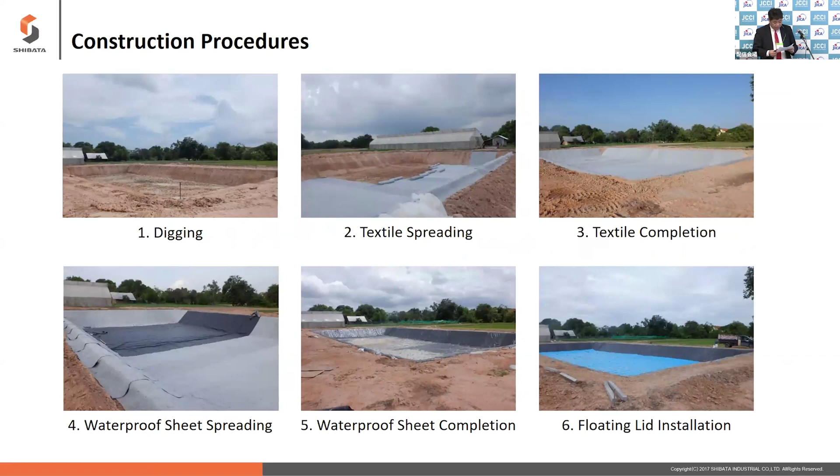By using liners and floating lids, we can maintain clean water while preventing both evaporation and penetration. Construction is very easy: digging, textile spreading, waterproof sheet spreading, and finally floating lid installation. By using textile, we can make a smooth surface.

It took 3 steps to be adopted in Cambodia. Step 1: experience. We made small ponds at 3 locations to check if this product can be used in Cambodia. Step 2: we made 4 ponds at the Royal University of Agriculture in Cambodia.

We tested waterproof sheet and floating lids, waterproof sheet only, floating lids only, and hole only. Of course, using waterproof sheet and floating lids together got the best result, ensuring clean water and high water quantity.

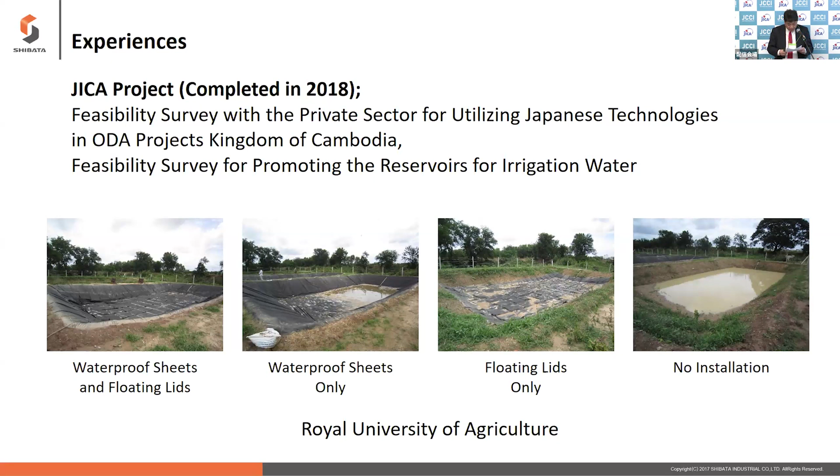Step 3: finally, we made full-fledged irrigation ponds. First, we selected candidate sites, and then we did an information session for residents. After completion, it can be used for agricultural water and for domestic water supply.

Previously, in Cambodia, ponds were used without liners. Step by step, our products have been installed in new ponds. It can be used anywhere easily. We hope that our product can be adapted in all developing countries. Thank you for listening.